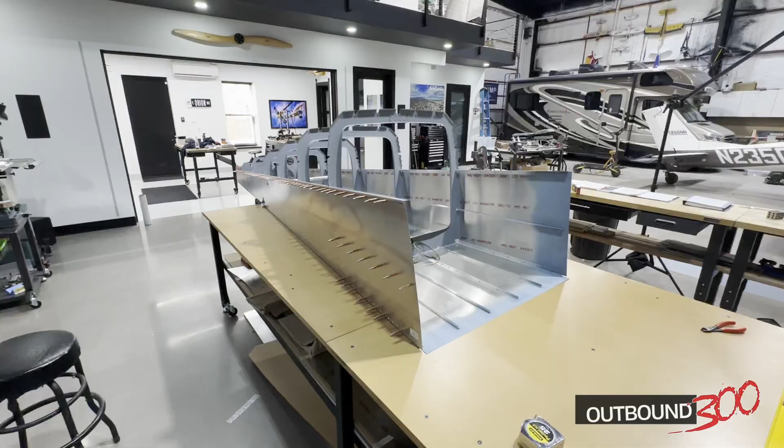Well, today's the big day. Today I mount the cage to the tail cone. My dad's coming over to help me, he's due here soon. I've spent some time cleaning up the bench, getting everything organized and clean.

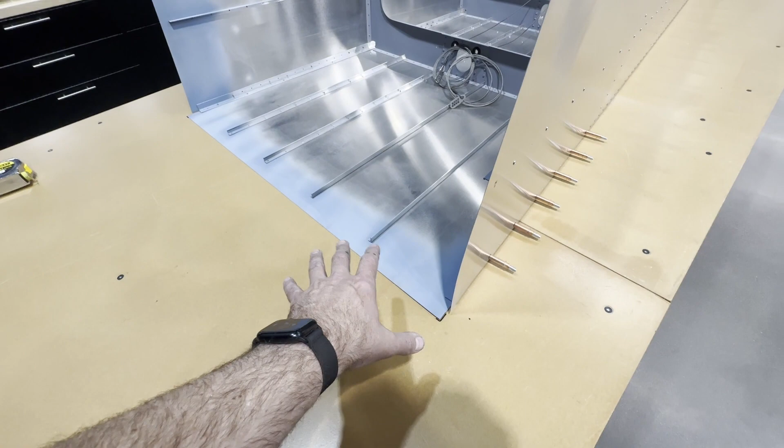I don't want anything cluttering my workspace because that clutters my mind. I've got these areas primed in the front. I have marked the table where the tail cone would sit, perfectly centered. Back here, I've clamped some blocks just to keep it from moving left to right.

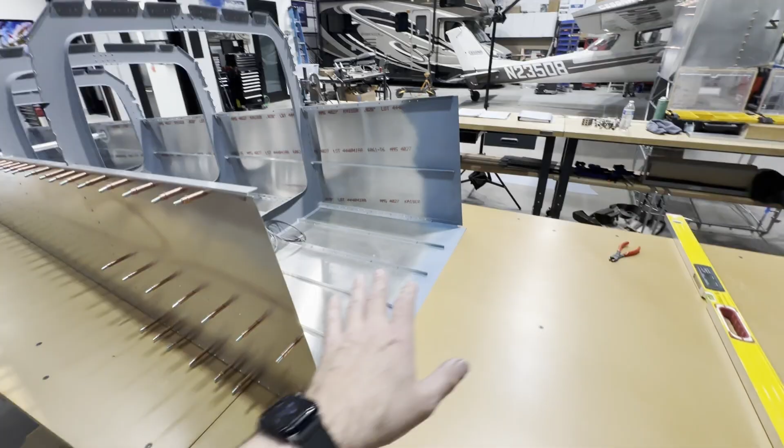I want to fix this to the table as good as possible. My bench is level. I've confirmed that the tail cone is also level at the front station, all the way back to the rear station. So right now the tail cone is set in a really good position and it's ready to take the cage.

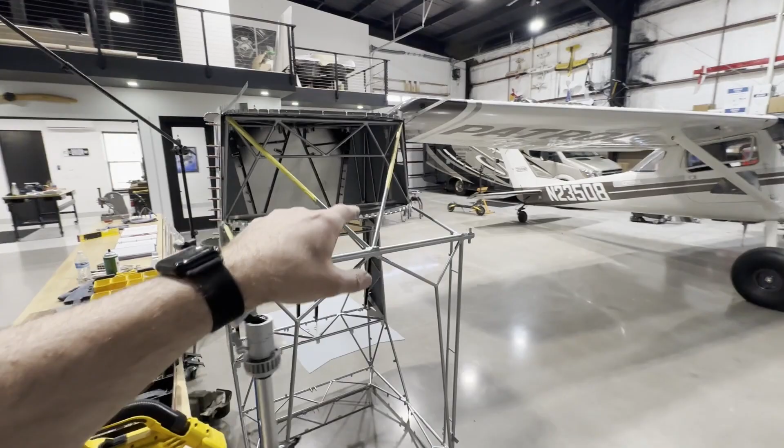I've got the cage over here. I need to pull off the boot cowl, I've been doing some work to it. I need to get all that off, get the firewall off, and just get it down to a raw cage. Check the fit, check the measurements, check them again and again, and then drill.

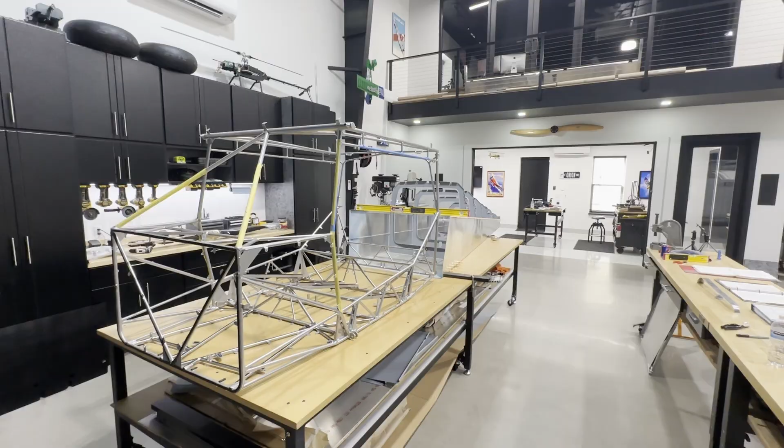All right, we got the fuselage cage brought up to the tail cone here. What I ended up doing was clamp some old extrusions I had just to keep this thing from moving left to right on me. That I think should be good enough. We'll see when I get to putting this in place if I need to change that.

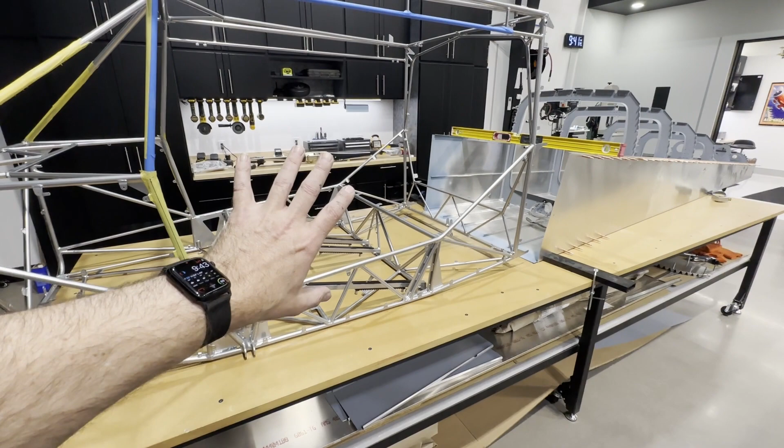But I think we're ready now to slide this cage up to it, get this thing shimmed up, and start taking some measurements.

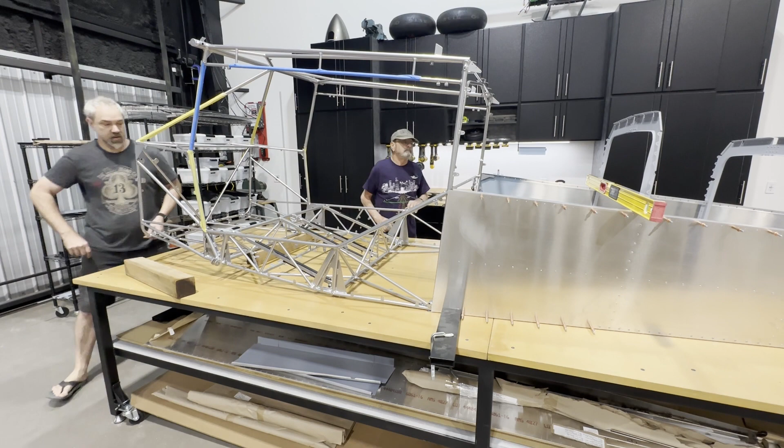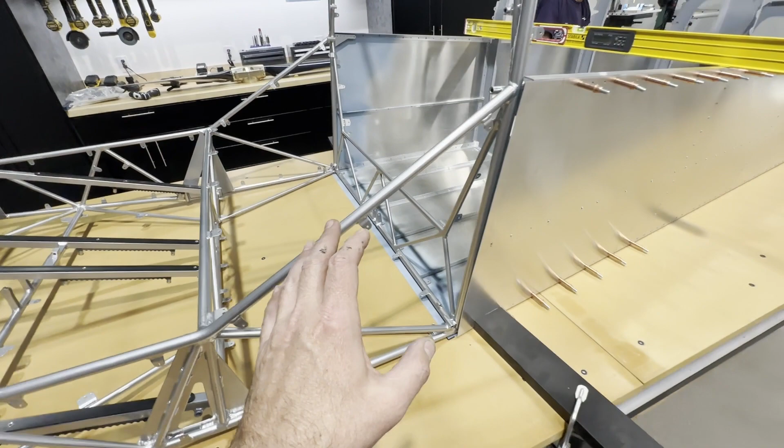Got the cage mounted up to the tail cone. Preliminary fit here, it's nice and flush against the skins down there on both sides. We've got a 4x4 block up here right now, and we're going to get ready to check this angle between the firewall tube and the longeron.

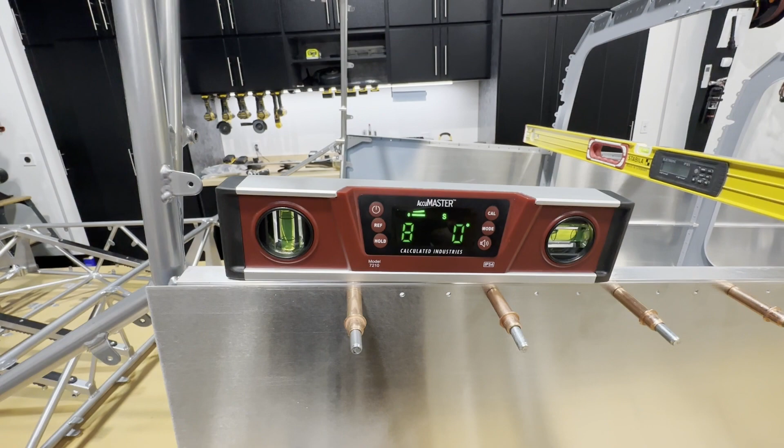So I've got that set, I've got it at 0. Now I'll come over here. And I have 89.2. I need to have 88.9 plus or minus 0.2. So I'll make some adjustments here.

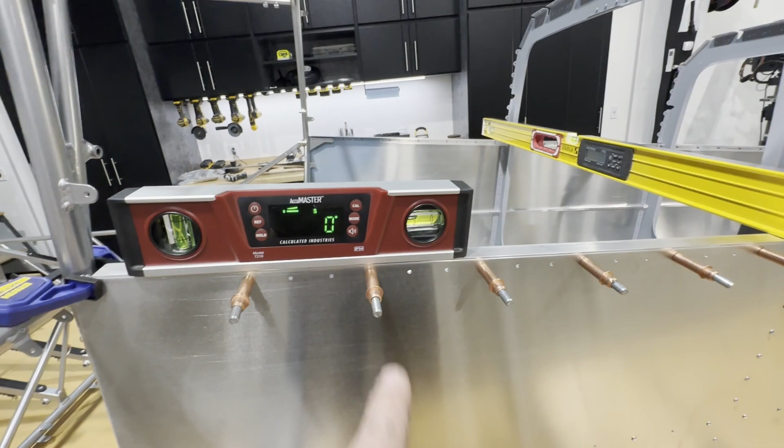All right, so here I've got it set 88.9 on this longeron in reference to this tube here. And what ended up helping was some 4x4s, pretty much right under where the landing gear will go on both sides, if you're a tail dragger. Eddie says don't worry about checking the other side against the other longeron, but I'll do it anyway, just for the hell of it.

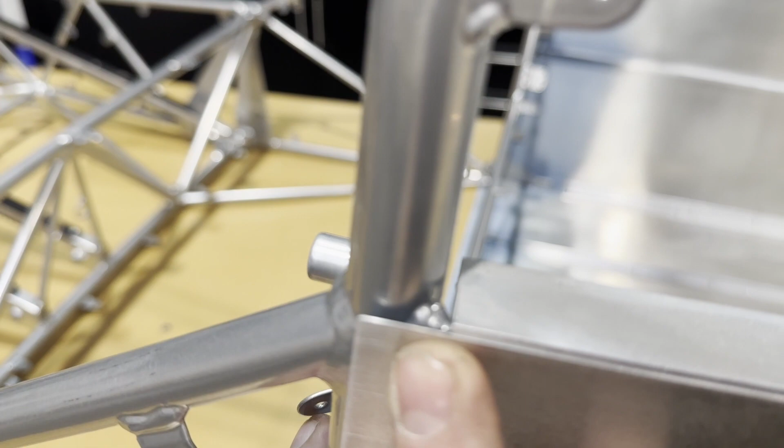I'm not quite getting close enough. I want to get a little bit closer here. And I am rubbing my stringers against that tube, and I don't want that happening. So I'm gonna pull this forward.

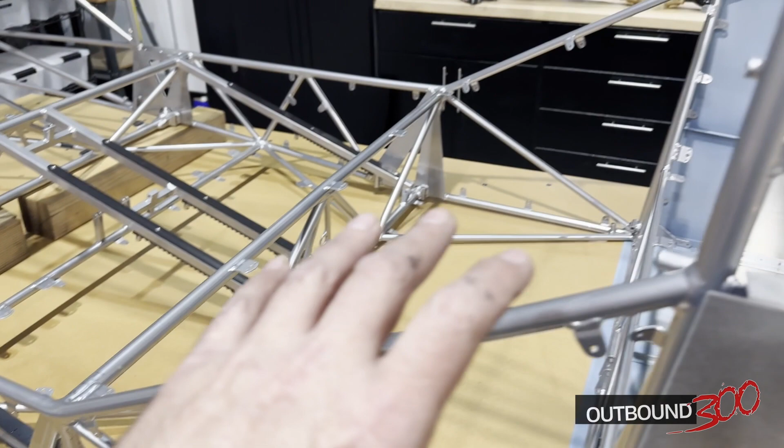At least we kind of know where we need to be with those blocks. I'm gonna pull this forward. I'm gonna get in there and trim the very ends of those stringers by about 3/32 of an inch or so.

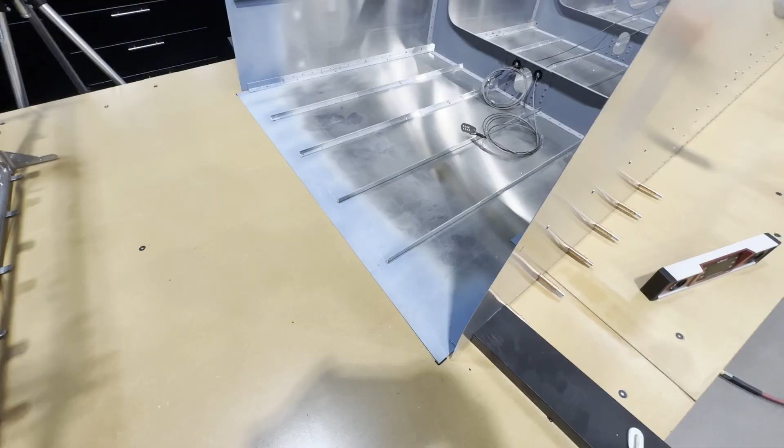All right, I got these trimmed back about 3/32 of an inch, filed them down. I think that's gonna get me the clearance I need. We'll bring the cage back up to it and we'll have a look.

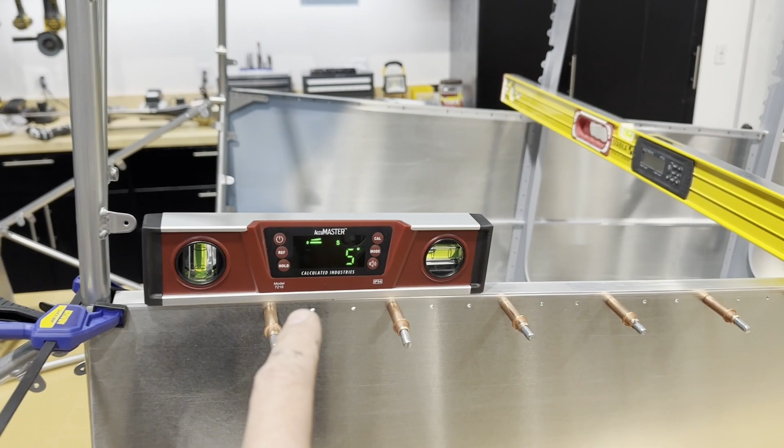Okay, so after a little bit of fiddling back and forth, both sides, what we landed on is I've got 89.05 on this side, which is within my 88.9 plus or minus 0.2. And on the other side, I'm at 88.7, which is 0.2 under.

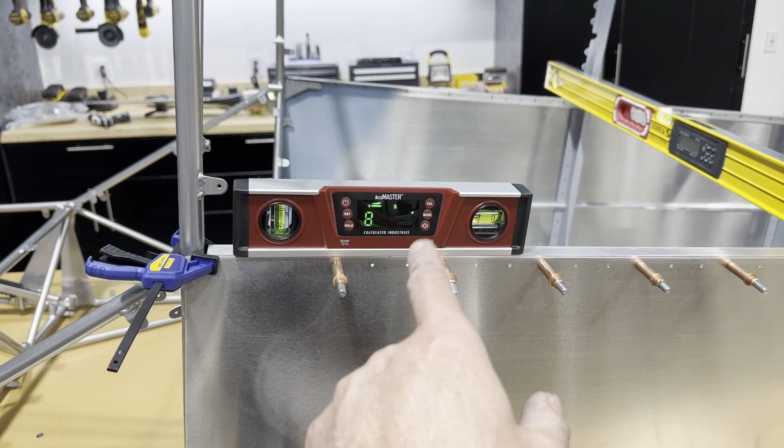So I'm kind of splitting the difference, rather than picking a side. If I picked this side and made it 88.9, the other side was outside of the 88.9 plus or minus 0.2. So I just kind of split the difference. And I know in the video, Eddie says don't worry about the other side, but I figured, well, if I split the difference, I can't go wrong.

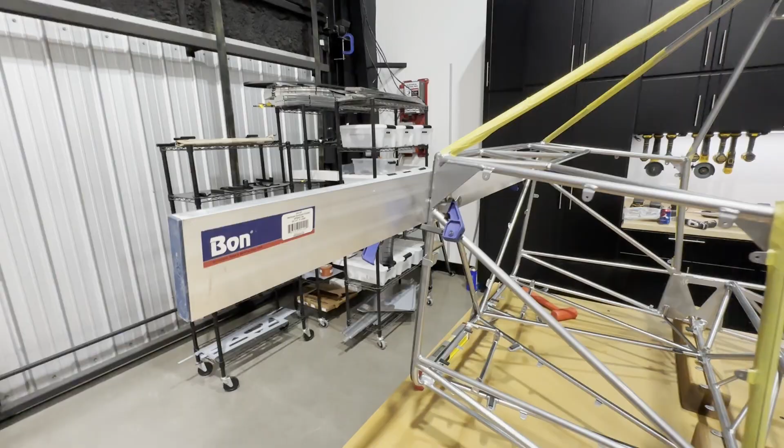We've got a little more space over there, but like I say, we're gonna clamp this aluminum extrusion to the front of the fuselage, and I'm gonna start triangulating back to the tail cone and getting my left to right set now. Okay, I've got this extrusion clamped up here.

We've got equal dimensions hanging off the sides, 18 and 3/16 in this case. I've also got it level, and it's clamped to the firewall there securely. Incidentally, this is an extrusion, you can get these for pretty cheap. This is a concrete screed, and they make great straight edges for stuff like this. I got it on Amazon, it's a 6-footer.

So now what we're gonna do is, we've got our tape measure strung in there. We're gonna stretch it out to one corner, take a measurement, come over here, take a measurement, and we're gonna start seeing where we're at with our longitudinal straightness here. I am 194 and 15/16. Okay.

All right, you're marked. 195, so I'm a 16th long. We need to just bump it, just a bump.

Yep, exactly, so they're dead on. Dead on, I like it. So now we're gonna make sure we don't bump anything.

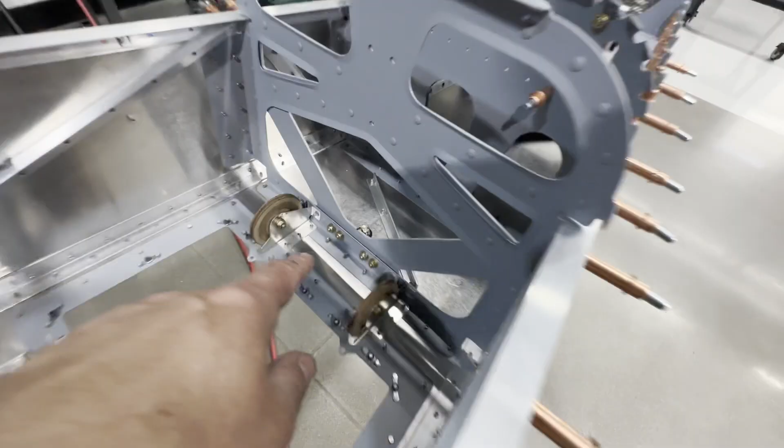All right, we struck our measurements. We had to make one small tweak. I had to tap the left side of the fuselage back a little bit to get it to turn just a touch, we were off about a 16th of an inch. Also I found that this was extending out too long, the tape measure was having to take a bend after that, where the cage ends. So I just sighted down where I could see a clear path and made a mark here and the same mark over there, so that's what we use for our reference marks. We came straight back here to a mark I placed on the center of this bulkhead, if you can see that black mark, and we ended up with 194 and 15/16, both sides.

So I'm gonna do one more check on our 88.9 degree nominal measurement, and we'll see if we didn't change anything there.

We've done one more round of checking. I'm still splitting the difference on my angles between the firewall tube and the longeron here. I'm getting 89.1 here and 88.7 over there. So I'm within tolerance on both sides, and I'm splitting the difference exactly.

So this is it, we're ready to drill. Everything is tight here on the bottoms. Pull this in, and I'll get a drill bit in there, and we'll do it. It's another scary part of the build, because once you do this, that's it. But I'm confident we've got everything the way we need it.

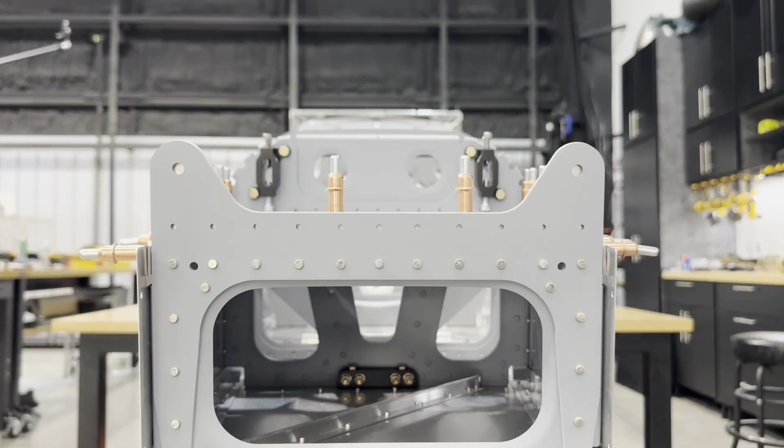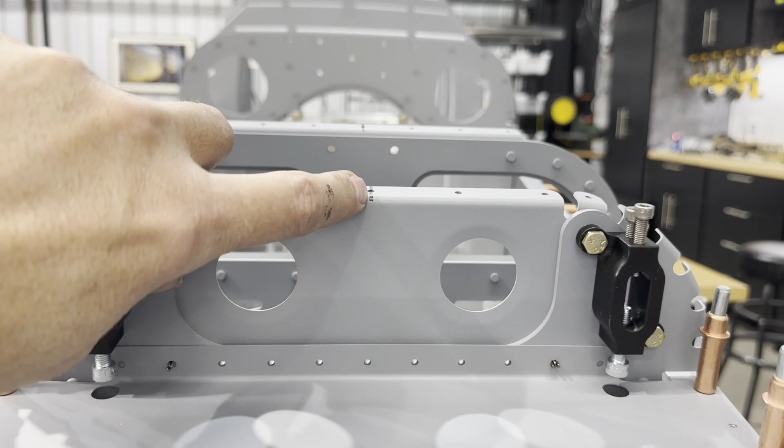Here's an interesting thing I thought I'd check. It's kind of anecdotal because we've already checked all the measurements, but I'm sighting down here at the tail cone. I had a mark up here on the center, and if I take that like a gun sight, I go to this notch in the Station 4 bulkhead. My focus isn't going to really allow you to see this, but see the tab at the very end? If I line all these up, there you go. You can see the tab. It will not focus. Anyways, that tab is the tab for the winch, for the skylight in the very center of the cage. So for whatever that's worth, you can sight down there and see everything is perfectly centered.

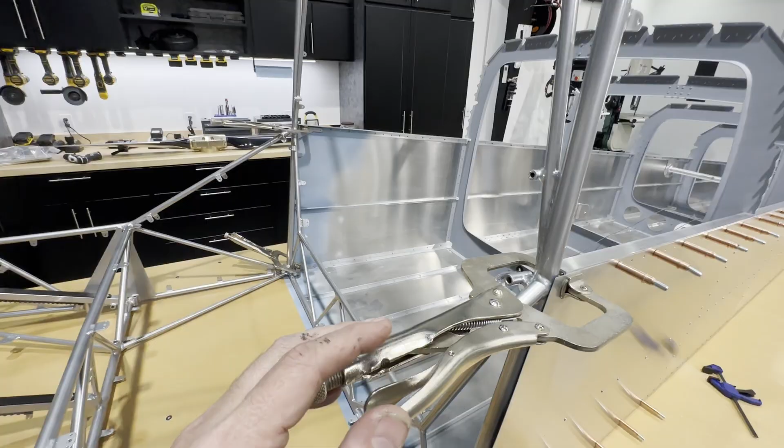I wouldn't do it that way—of course you want to take your measurements, but that just helps me confirm that yeah, we are definitely straight. I've got this clamped top and bottom onto the gussets, got some good clamping there. Again, I've checked the angles, everything is as close to perfect as it's going to be.

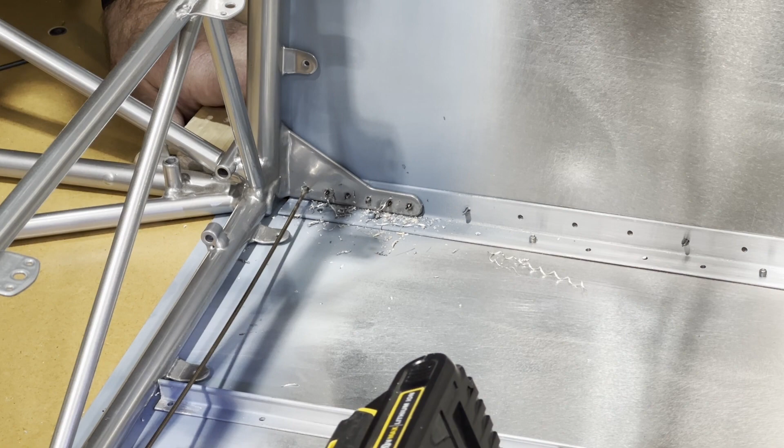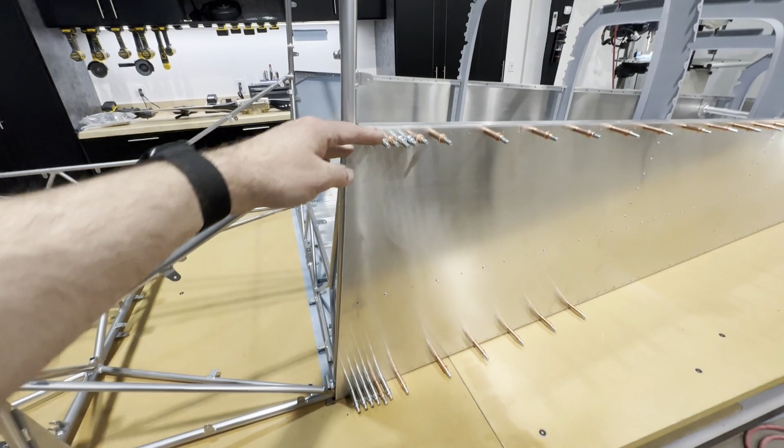Okay, we got everything drilled and clecoed. I was a little apprehensive about doing this, but really it's one of those things where as long as you've done all your measurements and double, triple, and quadruple checked, you just go for it. And I'm real happy with it, everything turned out real nice.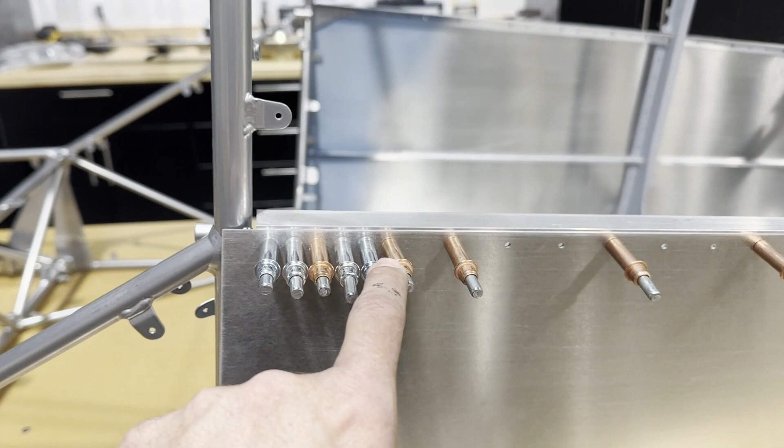Interestingly, on these gussets, I don't know if you'll notice, they have a couple that are number 30 in the back, and these are all 40s. Here there was a number 30, these were 40s, so I don't know what they do there, but I'm sure these all eventually get opened up to number 30. I just drilled them what they were and clecoed them what they were, so that's why these are different. But everything is in there, everything is nice and rigid.

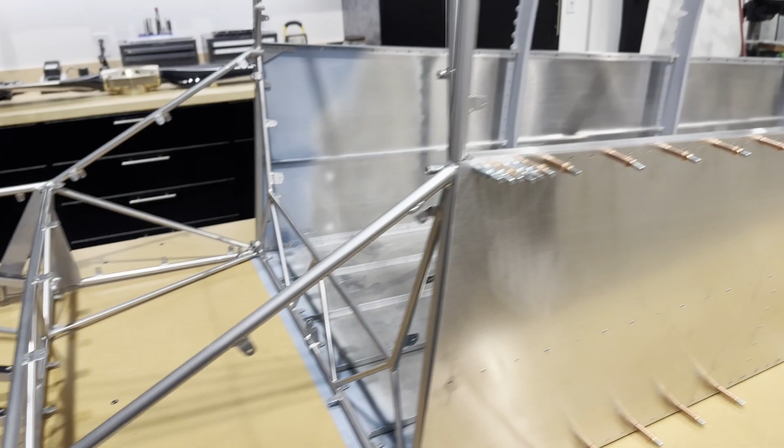I kind of moved the fuselage, it's all one now, so glad that's over. Now I can start working on things it's going to take to get the top tail cone skin in. But before that, that means running wires in—I've got a beacon I'm putting up in the tail on the vertical, antenna wires, an ELT that's going to mount somewhere. I'm not sure if it's going to mount in here or here, but I've got some avionics things I need to do. So I'm going to start getting those put together, and then I can put this top tail cone skin on. At that point I can start rotating this thing to start finishing up things like the bottom skin in here.

So little by little, but the mating of the cage to the tail cone went really well. I would say if you're at this stage, it's probably normal to be apprehensive about it, but if you just follow the manual, watch a couple YouTube videos, and just do it, you'll be fine.

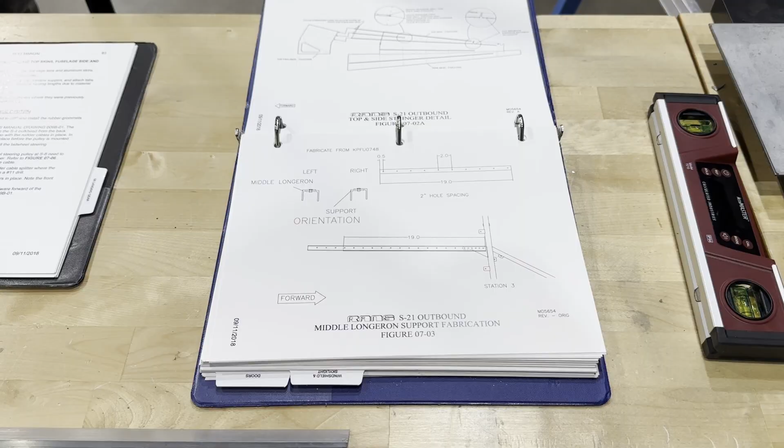Now that I've got the cage mounted to the tail cone, I'm going to work on the middle longeron supports. They have you cut some longeron material to 19 inches, and it's going to end up getting riveted up underneath the longeron, effectively creating a U-channel section, riveted from the top down.

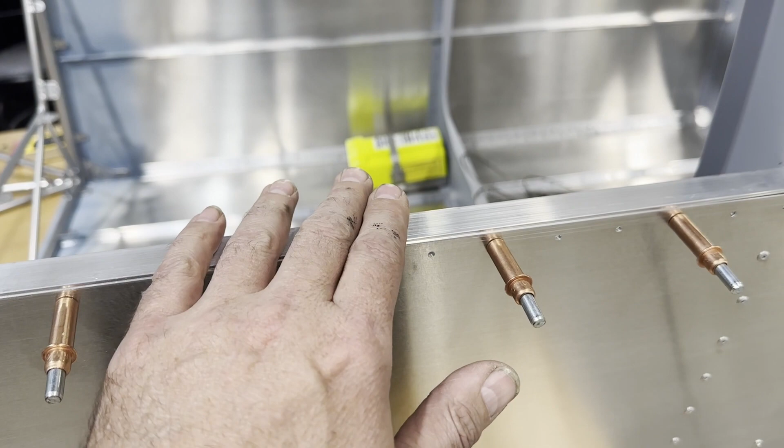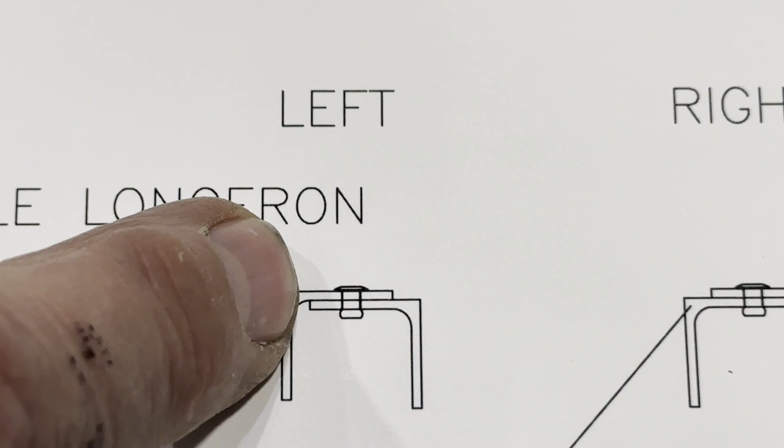You can see the rivet hole spacing here is a 2-inch spacing with a 1/2 inch edge clearance. So my approach is I'll cut these, mark out my holes on the longeron, drill those, then set the support piece up and match drill through it. I don't want to run into a situation where, if you're not careful, you'll start to hit this radius, and I don't want it sitting too far in so the holes won't line up.

So I'll drill the middle longeron, set the stiffener up right up to that inside radius, then match drill through that. That way I know the parts are fitting tightly together and I don't have a situation where this edge is riding up on that radius.

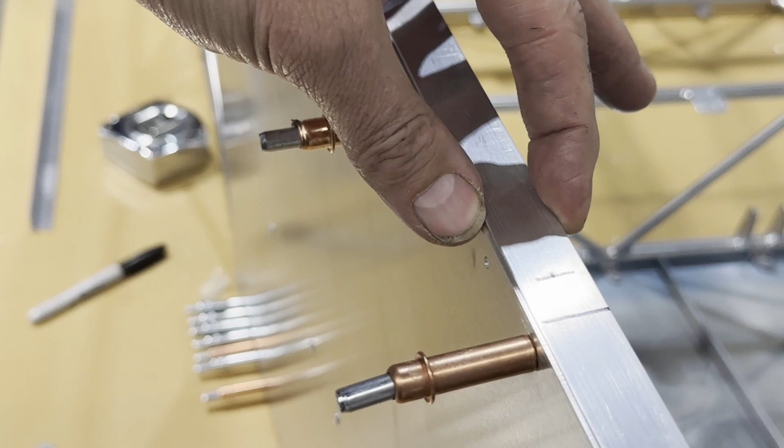What I've done is come in a half inch here, placed a mark, center punched it. This line here is the 19 inches, where the support ends - I came in a half inch, marked it and center punched it. I didn't put it exactly centered in the width of the longeron - I favored about a 1/16 of an inch this way, to take up the difference for the 1/16 inch of this leg of the angle that goes down. So it doesn't look centered from the top, but from underneath, when I pop through, it would be centered in the material left underneath, if that makes sense.

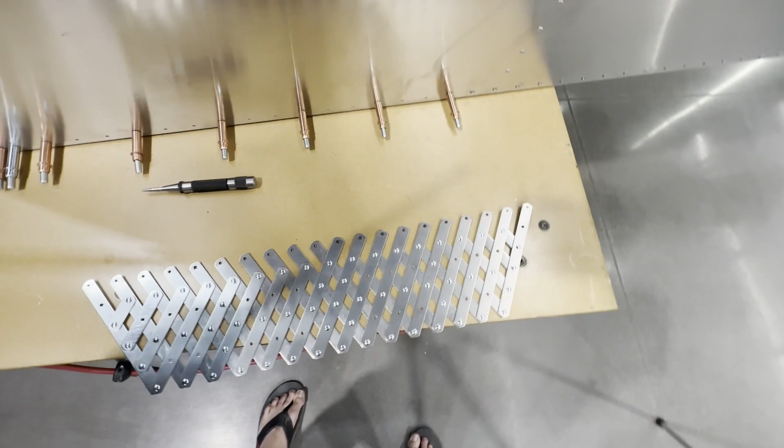With my rivet hole spacer, if I put one in the end and one at the last position, that gets me exactly a 2-inch hole spacing if I take every other hole - so I'm at 4 inches there, and if I come over 2 inches, that's 6, right there. So I'll drill this out here and here, Cleco those in, mark those holes, and drill those.

Got all those drilled, got my piece here. I've already set my piece in and found where I wanted to locate this hole, and I've drilled it. So now I'll Cleco this in place, then swing this one over to where I get the fit that I like, and drill this.

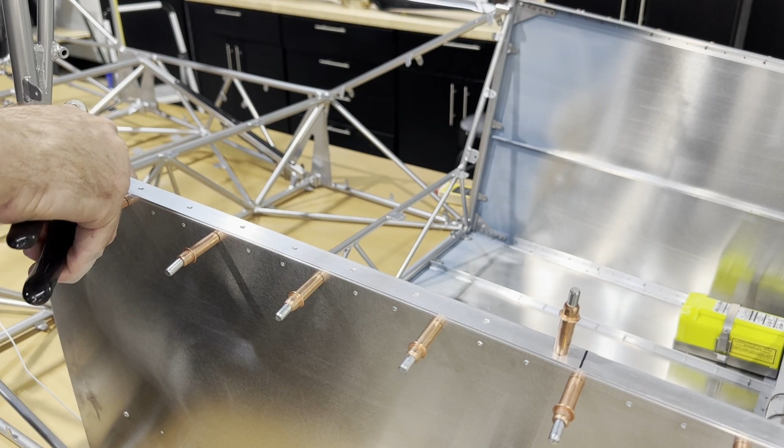And I'll Cleco that. Now I can come in here and transfer drill all those. Those are all in there.

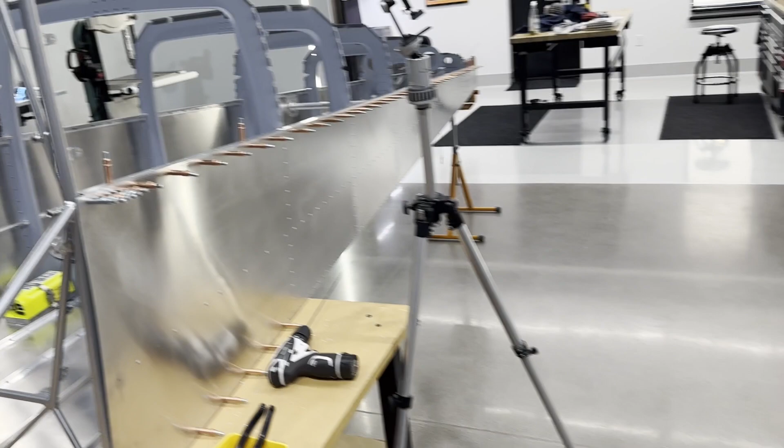That can be taken apart and deburred now. This is what you have on the inside - you can see it creates a U-channel section here. The manual says it doesn't get riveted until later, so I won't do any riveting. There's a double asterisk here - riveted during aft baggage installation - so I'll hold off on that. I will go ahead and duplicate what I did here over on that side.

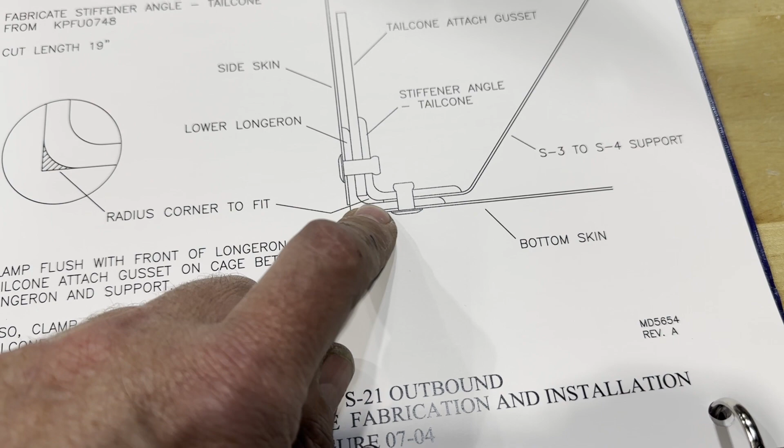Now I'm going to fabricate the stiffener angle that goes on the lower longeron, also 19 inches in length. This one they have you radius the outside corner so it doesn't interfere with the existing radius and the gusset. I've got these cut already - got one here, and another one somewhere. So I'll clamp this to my table, take my die grinder, and bevel or radius that outside edge.

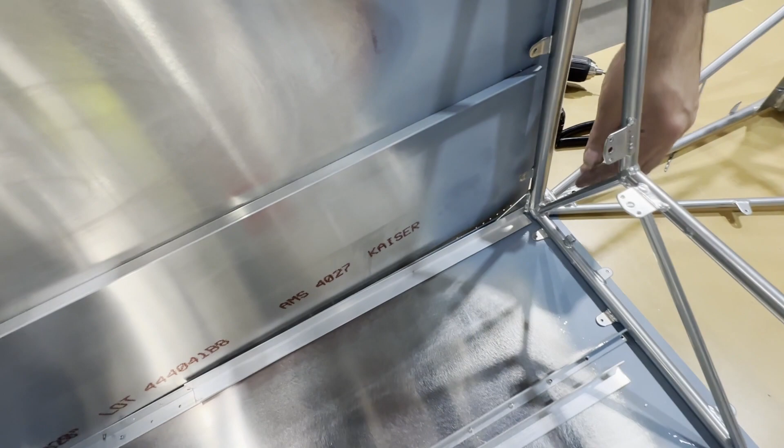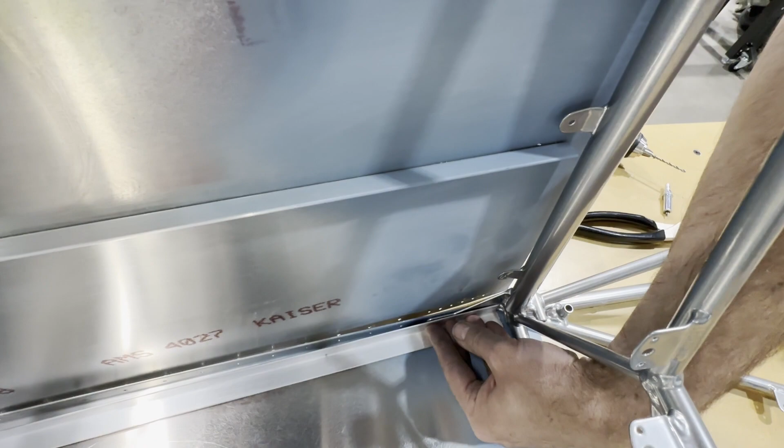So I've got something here I'm not quite sure about. Here's my support piece, and they say it goes on this side of the gusset, then they say to clamp it tightly against the longeron there. But what you can see is you end up with a gap there, which slowly tapers to nothing back here. That can't be right, because when you rivet through here, you don't want open air that you're riveting through. You could probably clamp this and get it to contact by about the third or fourth rivet down, but what about all that right there? That doesn't seem right to me.

Normally what I would do in cases like this is I would have a spacer strip the same thickness that I would run all the way down and space that out. Then this could sit parallel and everything would drill through and rivet through that. So I'm not sure what I'm gonna do about that yet. It just doesn't seem right to me.

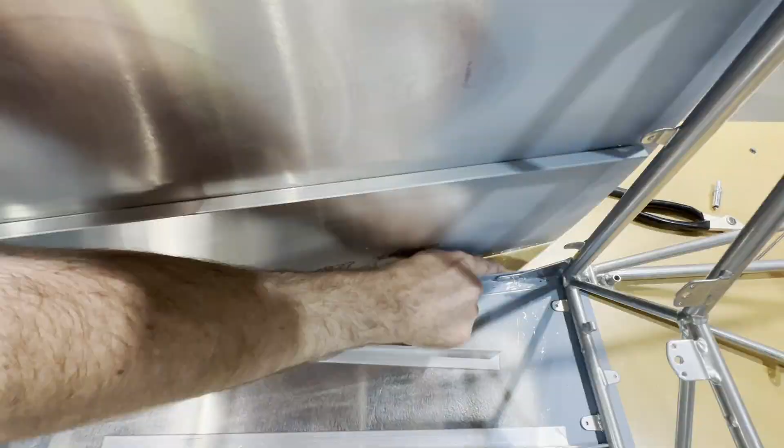So I looked at some other YouTuber builder videos, and all of the ones I saw, they were able to put their support outside of the gusset. I can't do that, there's just no way. You can see these holes in the skin wouldn't line up. So it's possible that my gusset here is welded in a slightly more outboard location than other previous builders. Maybe that's a change they've made in the frame, I don't know.

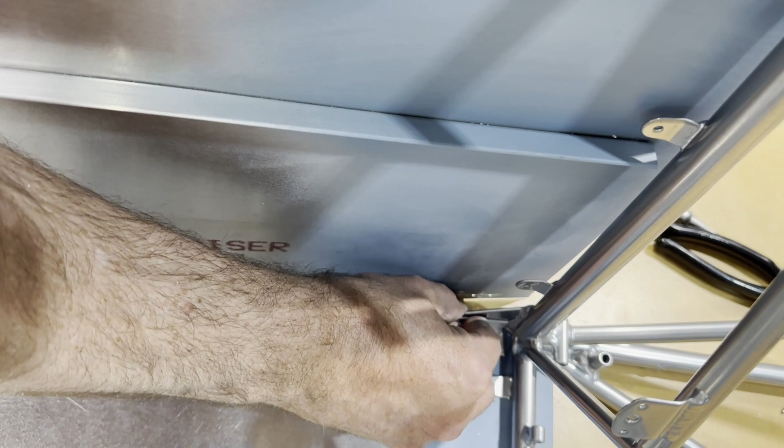So I am gonna have to put my support, I'm gonna have to sandwich the gusset in there, which means I do have that issue with the gap here. So I've decided what I'm gonna do. The manual just says to squeeze it, which I could do, but I'll end up with about 2 or 3 rivet holes here where there's a little bit of an air gap.

I just don't like that, so I'm falling back on the way I've always done things like this, where I'm gonna add this strip. This strip is the same thickness as the gusset, and I'm gonna add that for the full length down to the end of the gusset, right there, and I'm just gonna rivet, sandwich all this together.

To me, that just seems like a much better way to do it than to be flexing this support and having this air gap for these 3 holes here. I just don't like it.

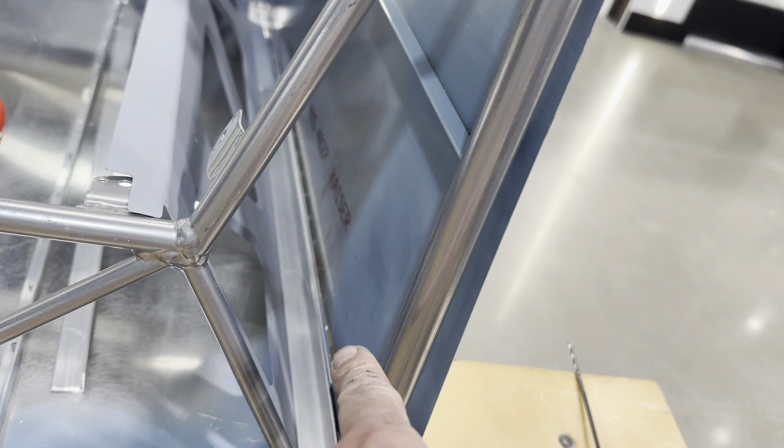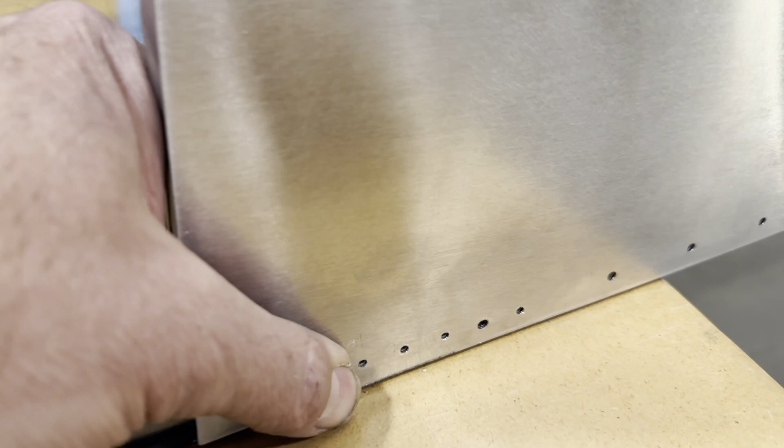So now that I've decided that's what I'm gonna do, the next step is to go ahead and put that spacer in there. I have it inserted. I've got the floor support installed, the angled floor support here. It is sandwiched, the little flange, the lower flange of that is sandwiched underneath the longeron support. So at this point, I could go ahead and match drill these holes through here into the support here, which is what I'll do now.

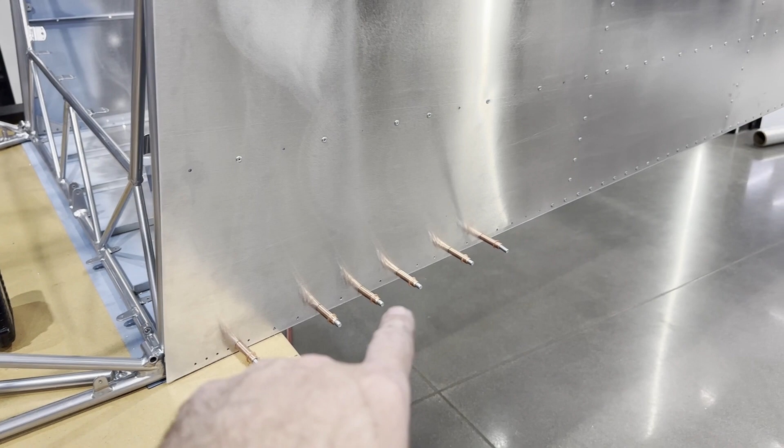I've match drilled through the side, through the skin, through the lower longeron, into my spacer, into the stiffener. Let me go over here and you'll get a better look at what's going on. There's my gusset. The gusset ends, my spacer picks up, carries that distance all the way down. And I've match drilled everything in there, deburred it, put it back together.

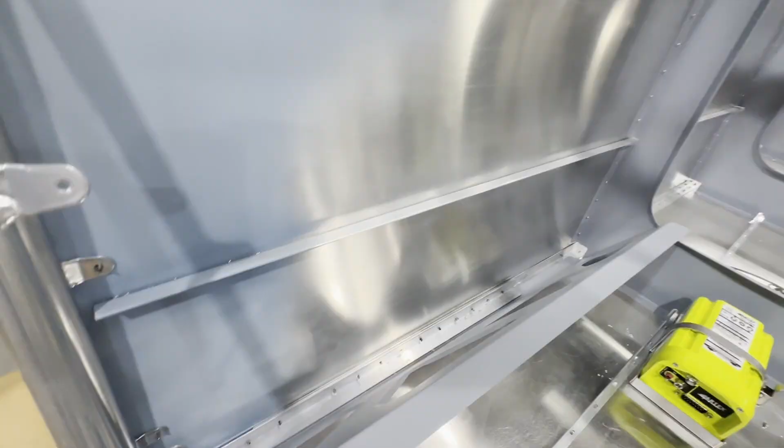Now I need to match drill up from the bottom. I got both sides done the same way. Got my spacer strip in there. Everything's match drilled from the side. I haven't match drilled up from the bottom yet.

That works. I would have preferred to have been able to put the support on the outside and not sandwich the gusset in there like most everybody I think is doing, but for whatever reason, mine just wasn't gonna work. So that was my solution. I'm happy with it. I think it's gonna be fine.

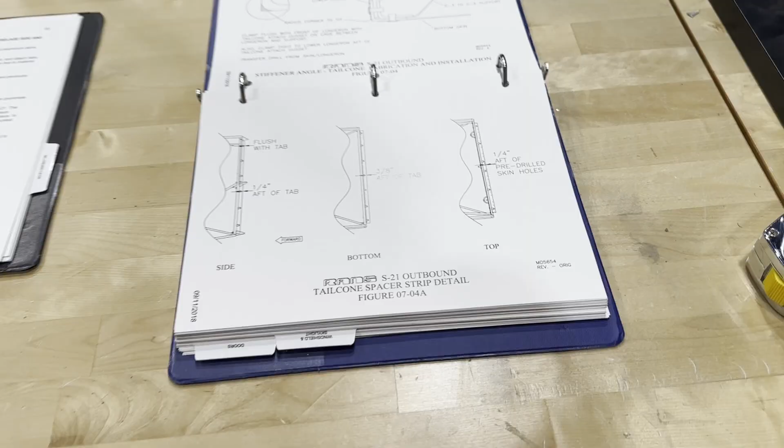Now I'm going to do the tailcone spacer strips. So they say to cut some strips to these lengths listed here in the text manual, and this is a detail showing how those are installed. This is the material here, it's just some strips.

That's gonna go around here. For sure these areas here, and presumably once I get the tail cones, the top skin up, I guess it probably goes around there as well.

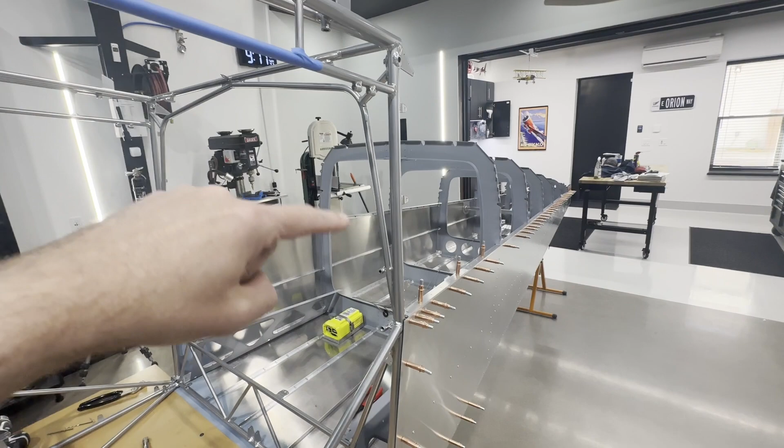Here's one of the strips for the lower side. I've already got this one inserted. The lower one fits a 1/4 inch. The aft edge of it is a 1/4 inch past the tab, according to the drawings. So that's where I've got those set there, 1/4 inch past the tabs, slipped in there.

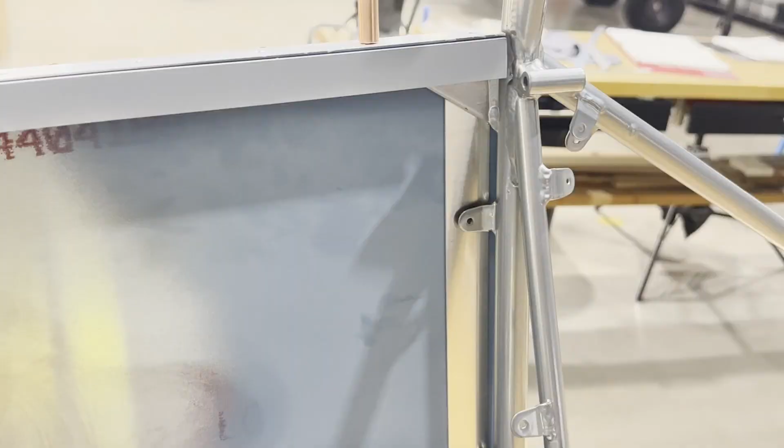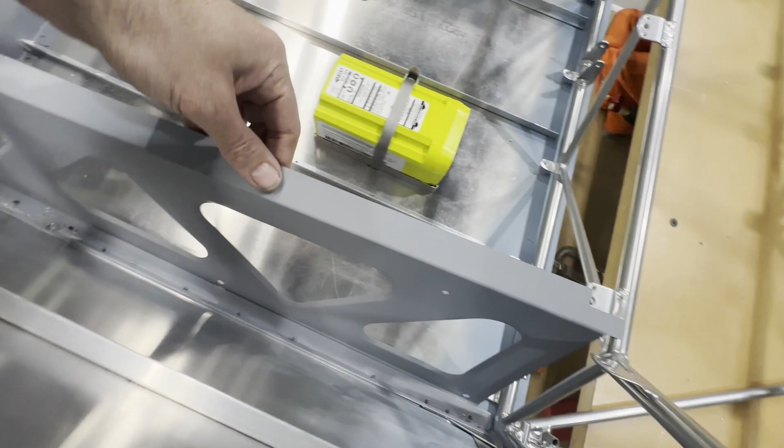And I'll fit, that'll get match drilled now, and then I'll fit this one here on the right side. Now that I got my spacer strips in, I've got the right side one in here, left one over there. I've located where these panels go, these floor supports. So that being the case, I can come in now and match drill from the bottom up through that support, also through the longeron support, the angle, and then also through the floor support.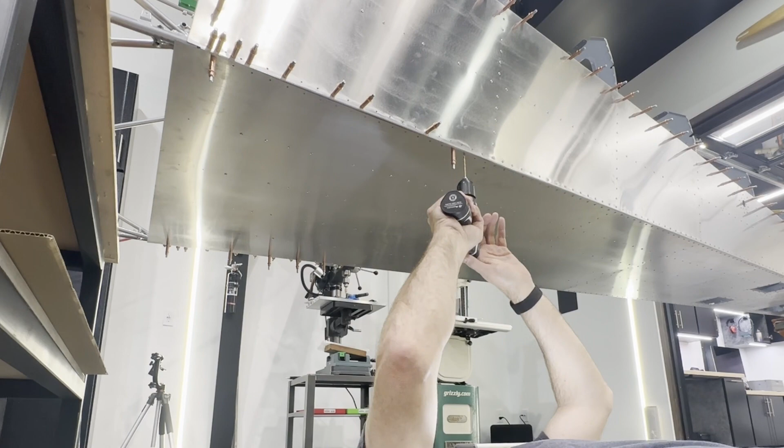Got those match drilled and clecoed. I've actually already took them apart, deburred everything. So that's all cleaned up and good.

Now that I know where this bottom skin is supposed to be, and now that these holes are drilled in the bottom, I can go ahead and place this bottom strip in here. It goes between the skin and the tabs. This one, they say 3/8 of an inch past the tab, so I need to move it over to about right there. I'll need to do that all the way down. But I'll go ahead and set that in place and match drill that.

Also just an FYI, you'll notice I slid the cage back so the joint of the tail cone to the cage is aft of the table here. So the cage is not supported—sorry, the tail cone is not supported on the forward edge, except for the fact that I put a material support in here, which is important because I had to take these out to get everything disassembled and deburred. Without the tail cone supported, you run the risk of putting all the load on these tabs up here, and you could really start to tweak things potentially.

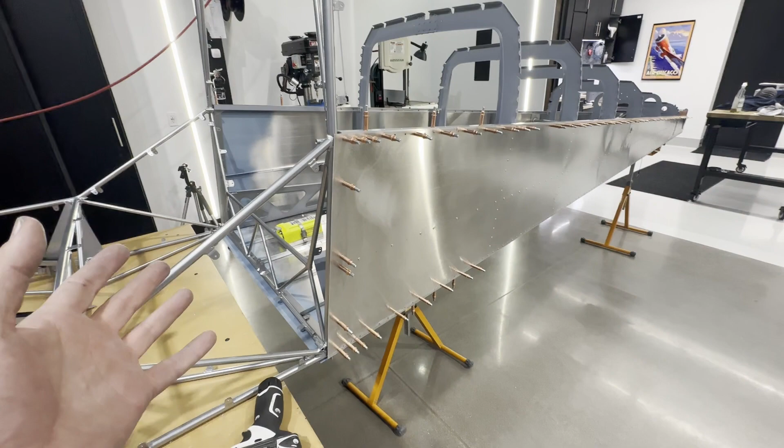So I made sure I put a lift in there and supported that while I have this apart and deburring. Just an FYI, you've got to be careful here because you're only clecoing the tail cone to the cage, and if you weren't careful, you could do some damage here. So just be cautious.

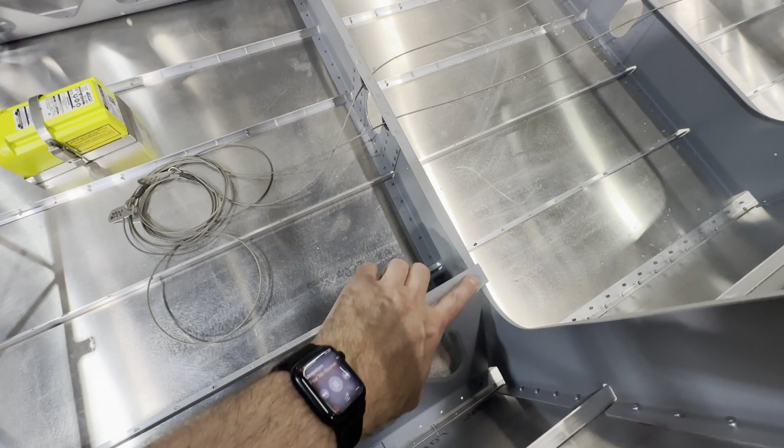The manual is calling for setting this down on the Station 4 bulkhead and drilling and putting a rivet in here on both sides. But I'm going to hold off on that because these get nut plates, and I want to be able to flex this up out of the way to get my nut plates installed there and there. So we'll look at the manual and see which nut plates go here.

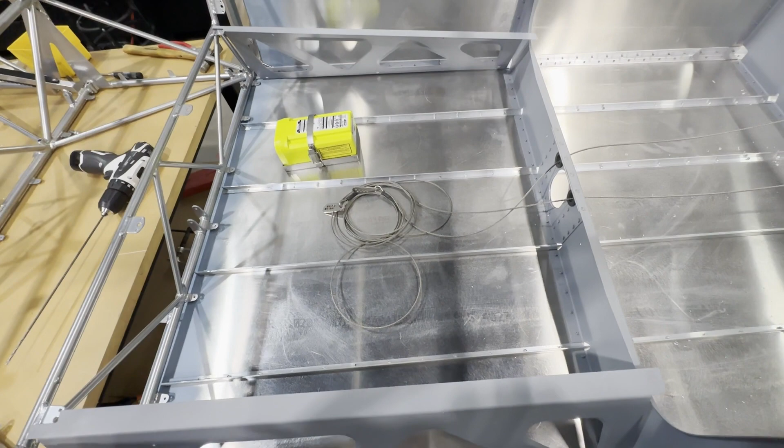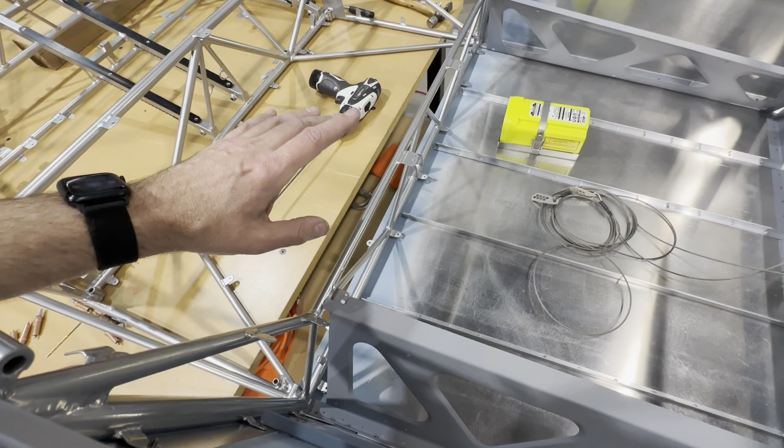I guess I'll do these in the middle too, because we're getting to the point where we're starting to work on the floorboard, so I may as well start looking at what's happening in other areas. Don't want to go down the road too far and make it harder to do something later. I didn't see anywhere the manual called out for putting these nut plates in yet, unless I missed it, but I think it's smart to do that now.

Okay, I got these nut plates in. I looked in the manual—those are 832s. So I got all 4 of those riveted in place.

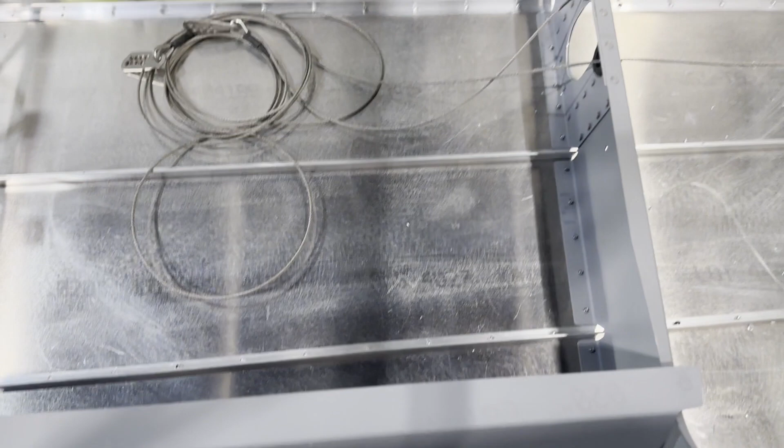I feel like it's safe now for me to go ahead and lay this down against the bulkhead. I guess I'll just bring it to where it rests there. Let me see if I can get a better angle here. It's got quite a bit of movement, but I think if I just bring it to where it's flat, put a hole right there and rivet it, it should be good to go.

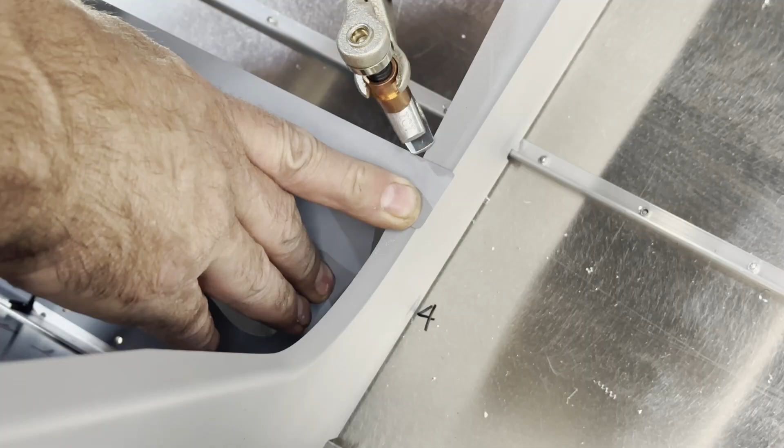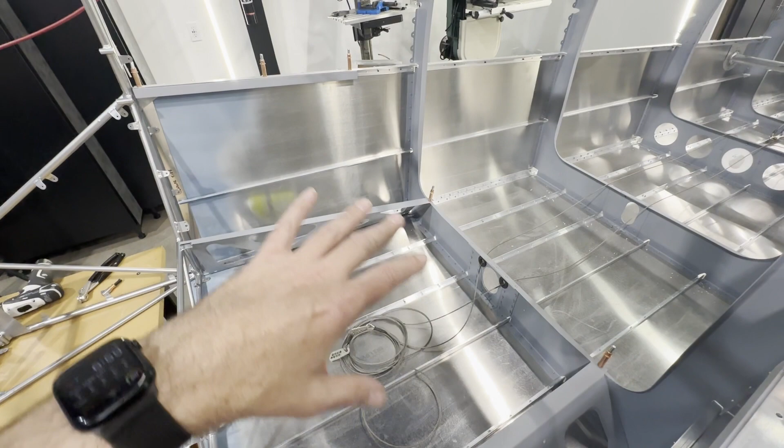Got those both in there, that worked out fine. I'm at a point here where before I start doing any more work in the baggage area, I really think I need to do the top skins. Once I at least fit them and get them clecoed in place and have that done, I'll take them off and then start working in the baggage area.

You've seen the ELT's been in here for the last few shots—I'm trying to decide where I want to mount that. Probably it's going to go back here somewhere. I've got some wiring to do, putting a beacon up on the tail. I've got an antenna back here for my transponder, and ADSB will be up there, but what I'm getting at is I've got work to do yet in here, and I don't want the skins on.

But before I do any fitting of skins and stuff, I feel like I just want to get the top skins at least fit. So that's going to be my focus next.

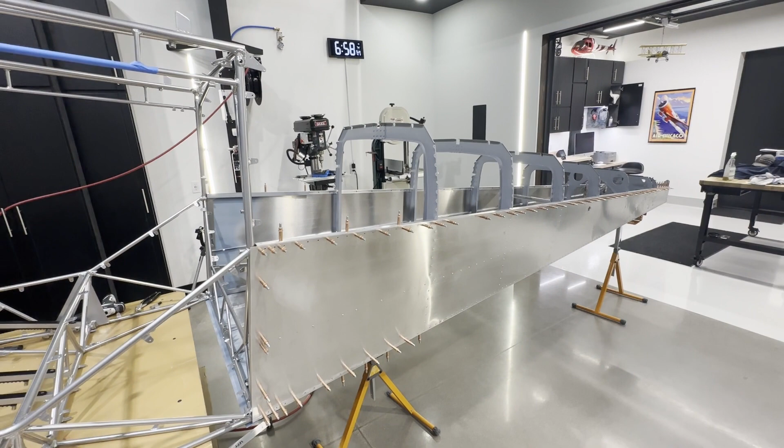I think now is a good time to end, a good stopping point. Next I'll have a part where I show the top skin fitment and window supports. There's a lot to do yet from this middle longeron up. Then from there it'll just be detail work in the tail cone, fitting the ELT and other things, then baggage and so on. I'll probably break those out and group up tasks like that into episodes. It's kind of hard for me to figure out where to end videos because there's just so much going on, but I'll group things together and do what makes sense.